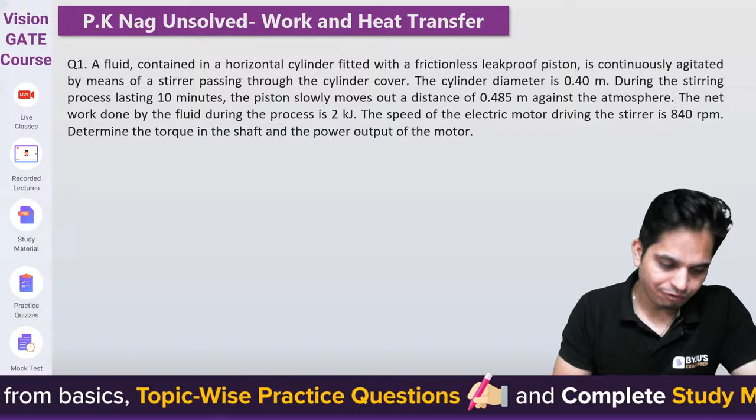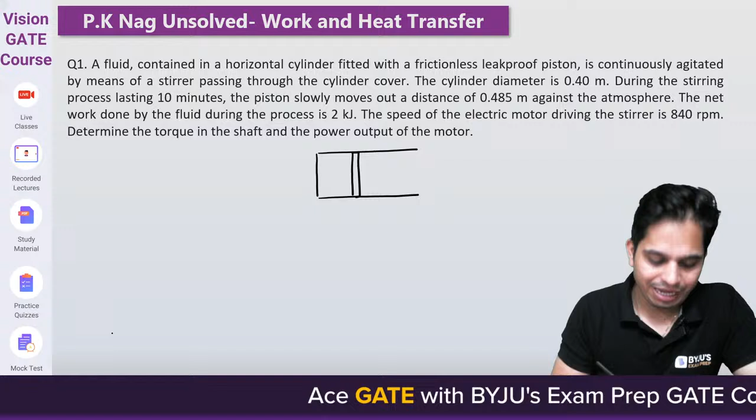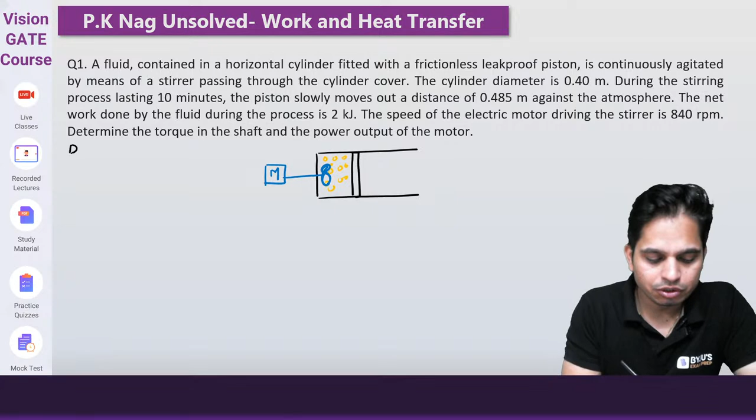The very first question. A fluid contained in a horizontal cylinder fitted with a frictionless leak-proof piston. Okay, so what do we have? We have a cylinder and we have a piston here, and we have some fluid in it. And it is continuously agitated by a stirrer. Okay, and this stirrer is run by a motor. Okay, now the cylinder dia is 0.4 meter, and during the stirring, lasting for 10 minutes,

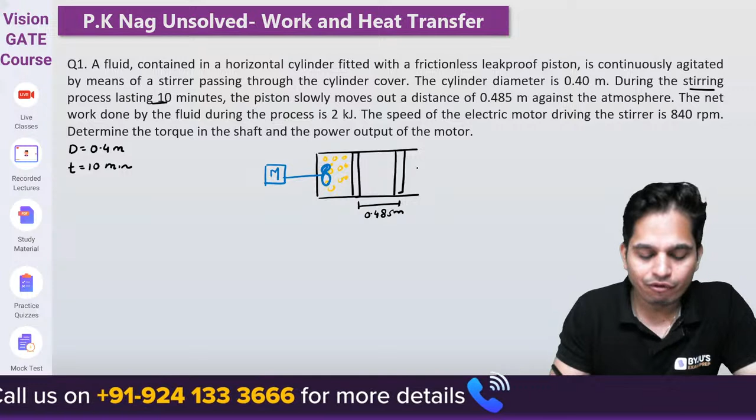that is, time of stir is 10 minutes, the piston slowly moves a distance of, how much distance it travels? It travels 0.485 meter against the atmosphere. The net work done by the fluid during this process is 2 kilojoule. Net work done is equal to 2 kilojoule. Now tell me, what is net work done? So work output minus work input is my net work.

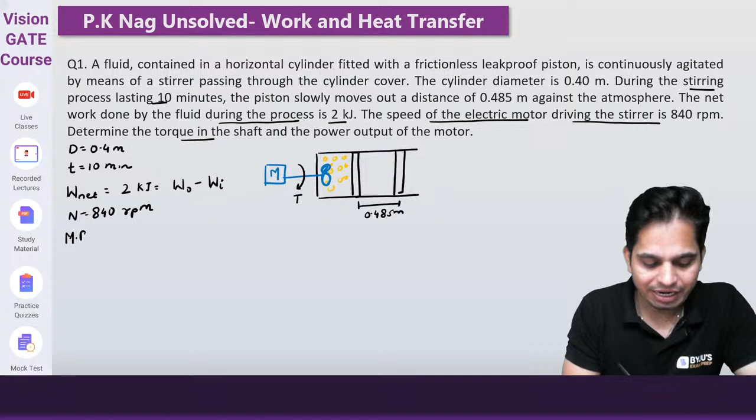The speed of the electric motor driving the stirrer, that is N, is equal to 840 RPM. Determine the torque in the shaft. Torque I need to find out, and motor power I need to find out, that is shaft power. So tell me, I know one thing. That power, shaft power or motor power, is equal to torque into omega. So torque will be equal to motor power upon omega.

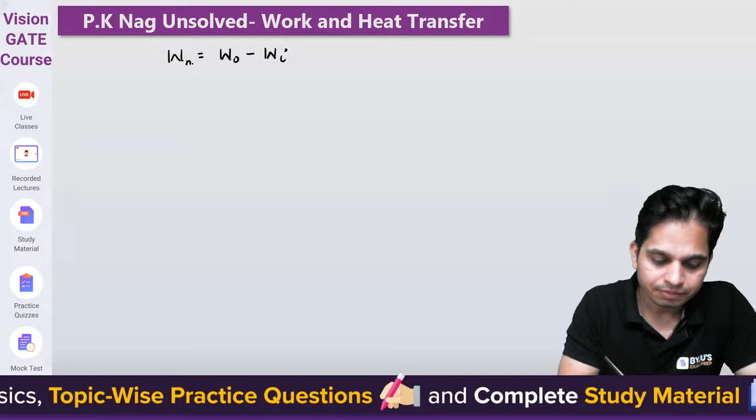And what is motor power? It is basically work input that you are giving. Okay, and omega is 2 pi N by 60. So I need to find out this. How can I find out this? As you all know, net work is 2 kilojoule. Let me solve it here. So net work is equal to work output, the work done by fluid, minus work input. So net work is 2 kilojoule.

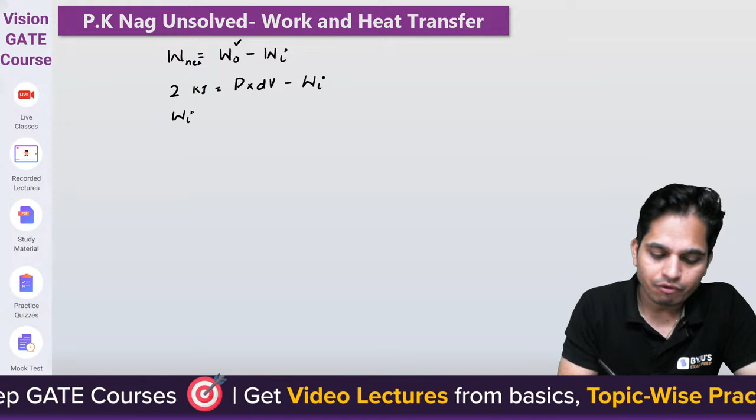What is work output? Work output from the fluid is due to the distance traveled by the piston, and it is happening against the constant pressure of atmosphere. So it is P dV minus work input. So work input is equal to P dV minus 2 kilojoule. Now what is the pressure, guys? Pressure is atmosphere, 101.325 kilopascal. What is dV? dV is area of piston into distance traveled. So it is 101.325 into pi by 4 D square into L minus 2.

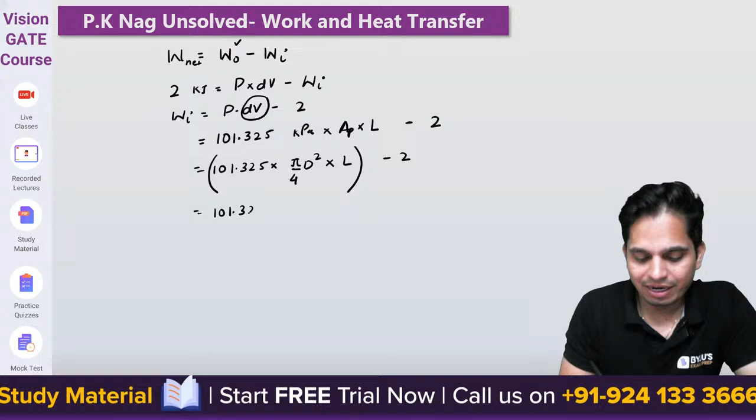101.325 into pi by 4. D square is how much? Diameter is 0.4, and length is 0.485, minus 2. Now, can you tell me how much is the work? How much is this value? So when you solve it, it will be around 6.175 minus 2. So it is 4.175 kilojoule. So this is the work that is going in.

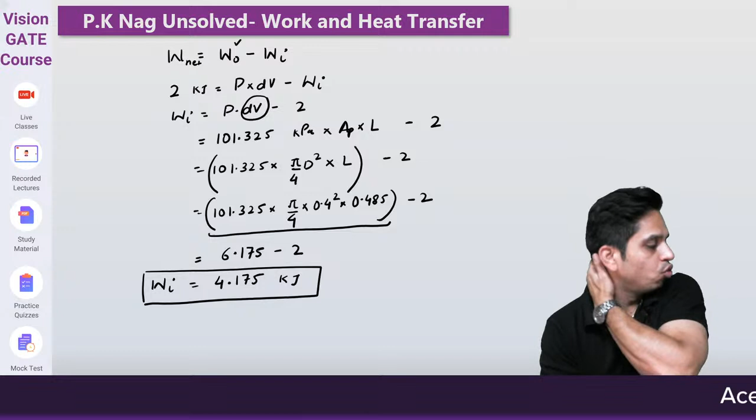I am sorry, I don't know. Satya sir, I think he takes class on the EC channel, right? So I am not very sure. But I think he is planning. So you can ask someone on the EC channel. Yeah, I am not sure. I am really sorry.

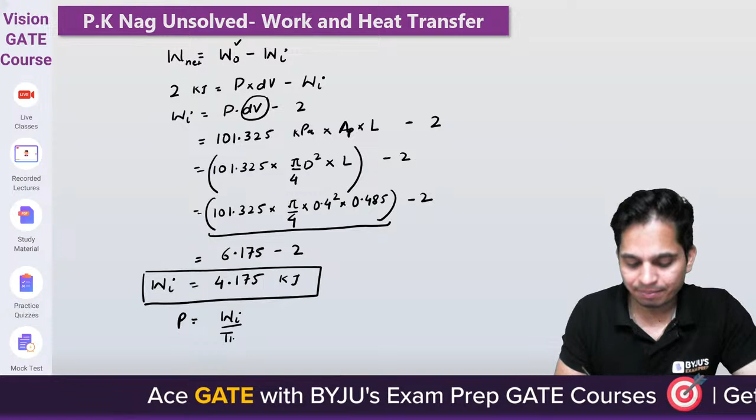Okay. So this work I have gotten. But you have to understand, I need to find power, not work, in kilowatt or watt basically. This work I am giving in kilojoule. So power is work input per unit time. So this is your motor power. So it is 4.175 into 10 to the power 3 joule upon 10 minutes into 60 seconds. So now you will get it in seconds.

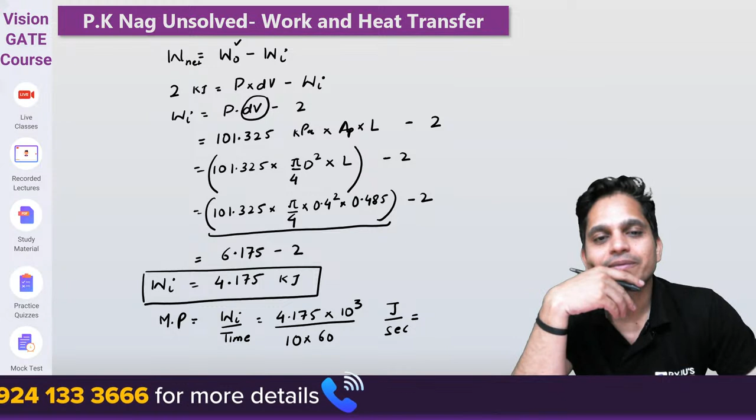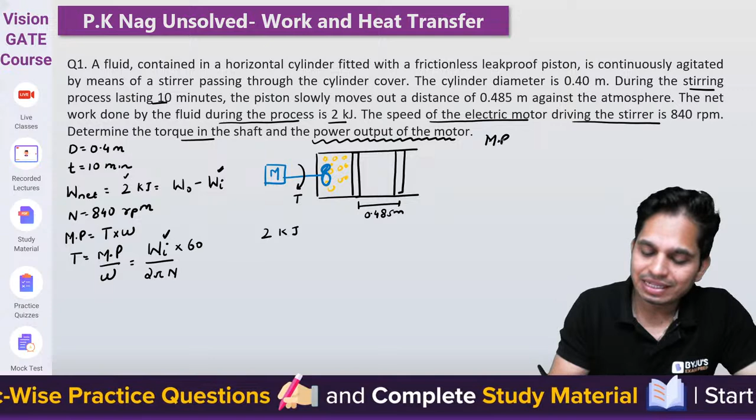How much are you going to get? You will get around 6.92 watts. So first of all, I have found out my motor power. Motor power is 6.92 watt. Now since I have gotten motor power, I can find out torque is equal to 6.92 into 60 upon 2 pi into 840.

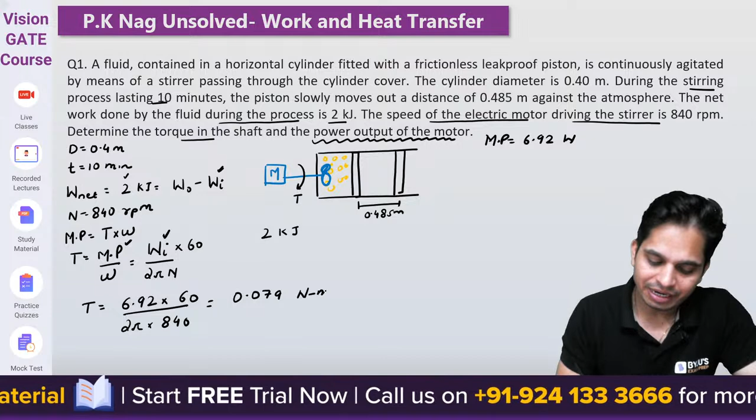What is the answer? How much torque are you going to get? You are going to get 0.079 Newton meter as the torque. Are you getting this? Guys, you have to answer, okay?

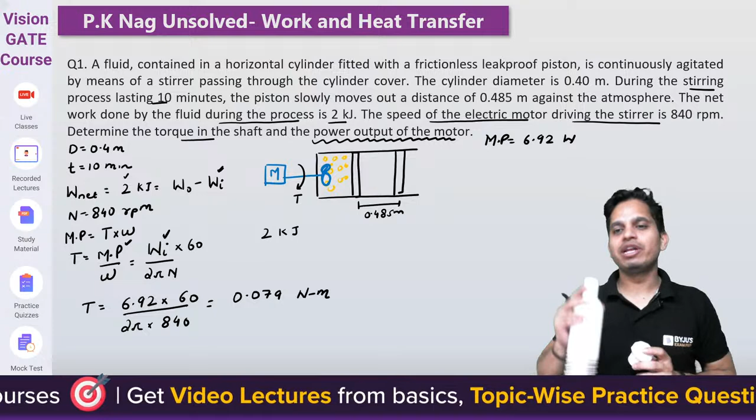This question is very confusing. A lot of students remain confused with this question, I don't know why. It's very simple. Net work is given. Okay, clear?

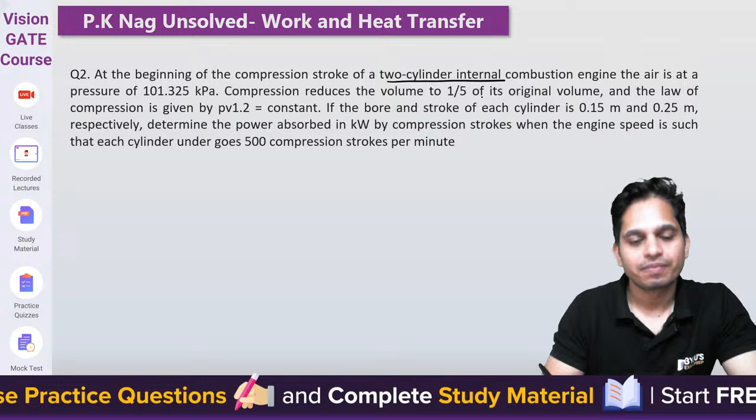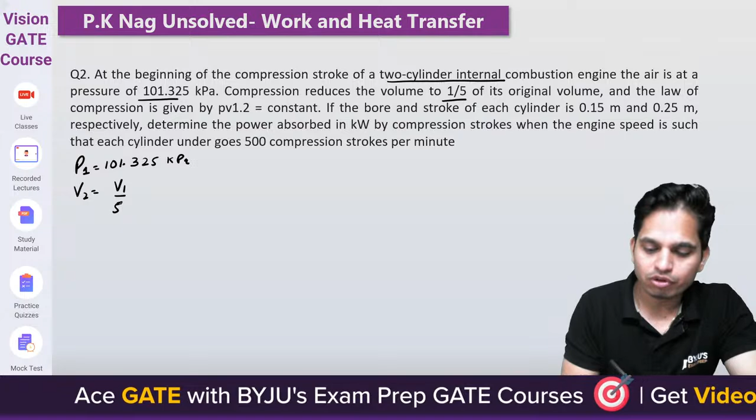Now let's move on to the next question. At the beginning of the compression stroke of a two-cylinder internal combustion engine, the air is at pressure, meaning P1 equals 101.325 kilopascal. Compression reduces the volume, meaning V2 is reduced to 1/5 of the original volume, and the law of compression is PV^1.2 equals constant.

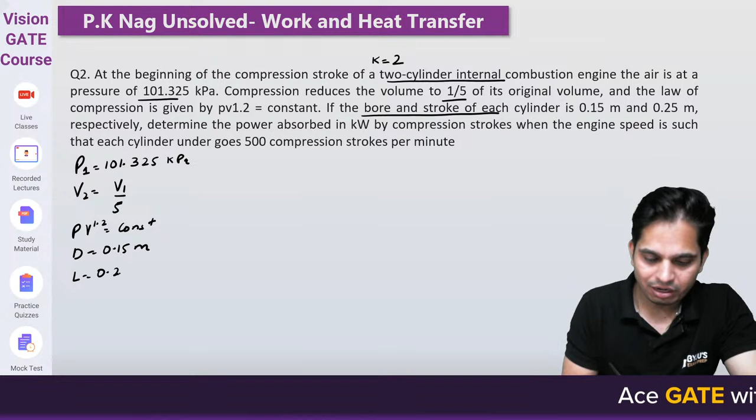Now the bore and stroke of each cylinder is given. We have two cylinders, so K equals 2. Bore is given as 0.15 meter and stroke is given as 0.25 meter. Determine the power absorbed in kilowatt by compression strokes when the engine speed N equals 500 RPM.

500 RPM. If you remember this diagram, when compression happens, it occurs like this - by constant pressure, then compression happens, then it goes out. So it is not 1, 2, 3; this process says PV^1.2 equals constant, and they are asking to work out power absorbed.

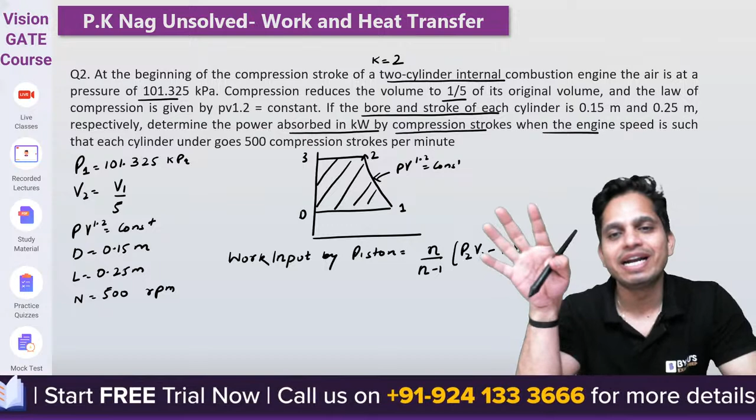So this power input is given by the piston, isn't it? It is given by piston. So if it is given by piston, first I need to find out work input, then I will calculate power. Let's talk about work input by piston, which equals n upon n minus 1, times P2V2 minus P1V1 - this is the formula we have all seen when solving these questions.

Now, n is known to me, it is 1.2. So can I say 1.2 upon 0.2? P2 is not known to me. V2 is not known to me. V1 is not known to me.

First, V1 I can find out using pi by 4 d-square into L. Everything is given to me: 0.15 square into 0.25. How much are you getting for volume V1? What you must get is 0.0042 meter cube. Yes or no?

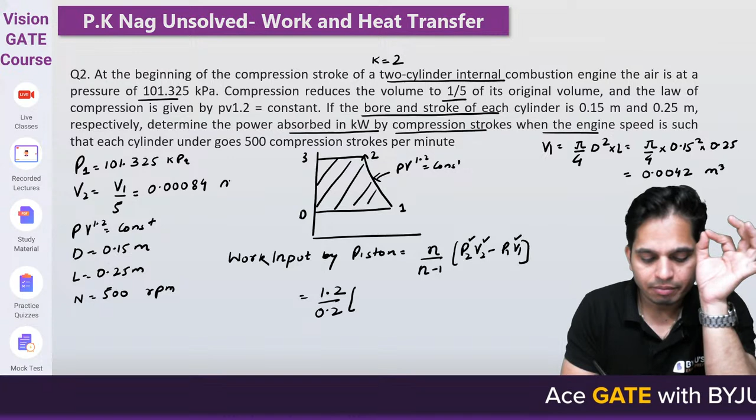Now that you have gotten V1, you can get V2. V2 is V1 divided by 5. So how much is this? This is 0.00084 meter cube. So now I know V2, I know V1, I can find out P2.

How can I find out P2? I have this equation: P1 V1^N equals P2 V2^N. So P2 equals P1 times V1 by V2, to the power N. P1 I already know, it's 101.325. V1 is 0.0042, V2 is 0.00084, and N is 1.2.

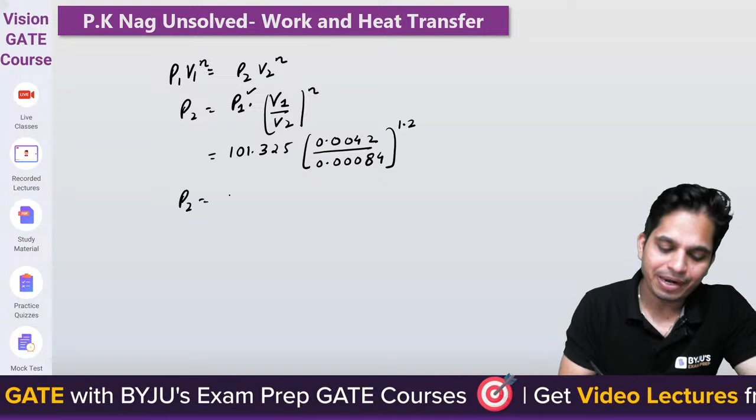So how much P2 are you going to get? This P2 equals - how much is P2 coming out to be? 700 kilopascal.

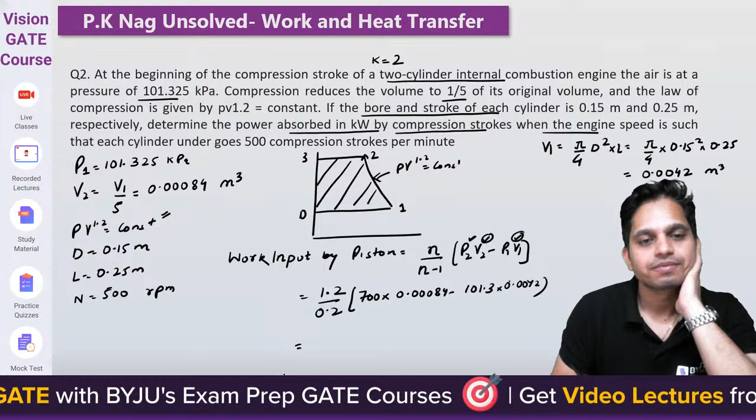So if I got P2, I can substitute here. P2 is 700 into 0.00084 minus 101.3 into 0.0042, so you will get the work. I don't know exactly how much work you are getting, but can you find out how much work you are getting?

700 into 1.2 divided by 0.2. So you will get around 0.974 kilojoule. Yes.

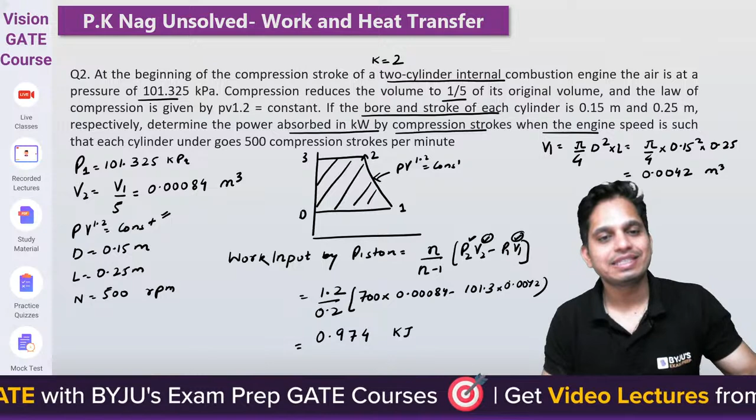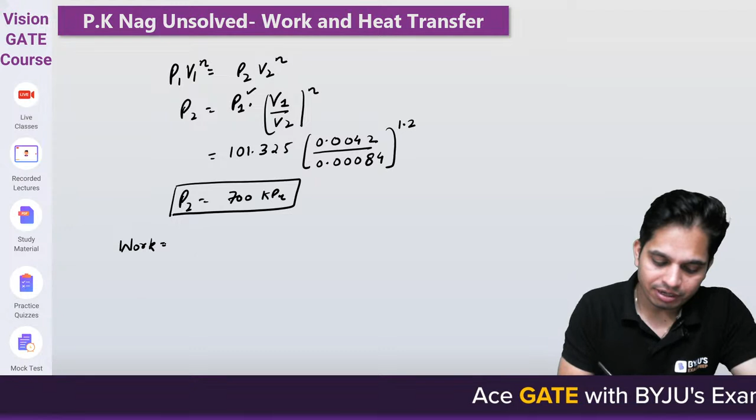This is what you are getting. And now they are asking power, not work. So I need to convert this work into power. Power is equals to work per unit time, and therefore I have 0.97 kilojoule upon RPM.

RPM is 500 revolution per minute. First of all it is RPM, so it's 500 by 60 per second. And we have two cylinders, so total power I need to find out. We have two cylinders, so if you can find this out, tell me how much you are going to get.

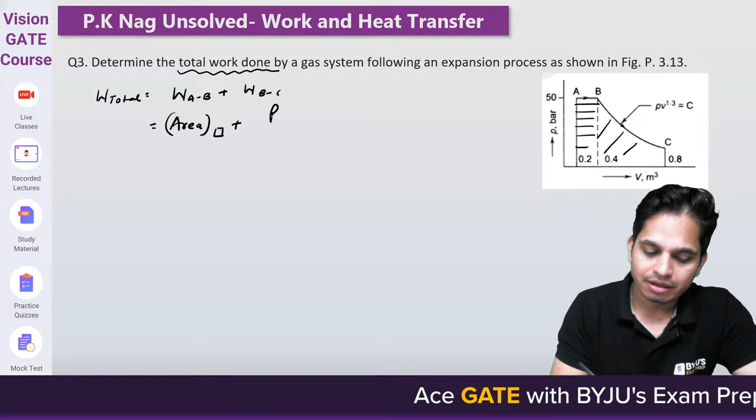BC I need to find out. So BC is a polytropic process. What is work? PB VB minus PC VC upon N minus 1. So this is height into width, length. So it is 0.4 minus 0.2.

Theek hai, now see, I know PB, I know VB as well 0.4, I know VC as well, but I do not know PC, which I can simply find out. How can I find out? PB VB to the power 1.3 is equals to PC VC to the power 1.3. So I just need to find out PC is equals to PB VB by VC to the power 1.3. So PB is how much? 50 bar, VB is 0.4 upon 0.8 to the power 1.3. Kitna aayega PC, how much is PC?

PC is I think 20 bar. Kitna aa raha hai? 0.4 divided by 0.8 to the power 1.3 into 50. 20.3 bar, 20.3. So now I know.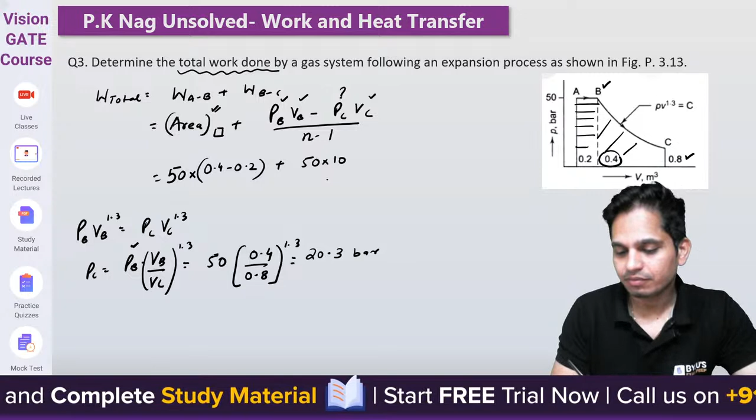So PB is 50 into 10 to the power 5. First of all, I need to write this into Pascal. So this is 50 into 10 to the power 5, now you will get in joule. So similarly, this into VB is 0.4 minus 20.3 into 10 to the power 3 into VC is 0.8 upon 1.3 minus 1. So how much is work total, kitna aa raha hai work total?

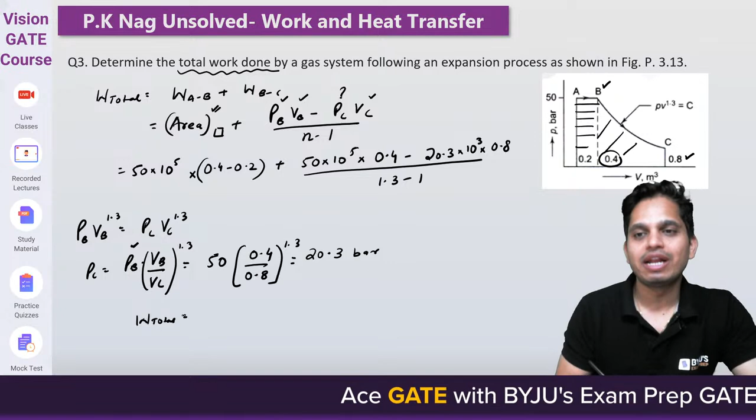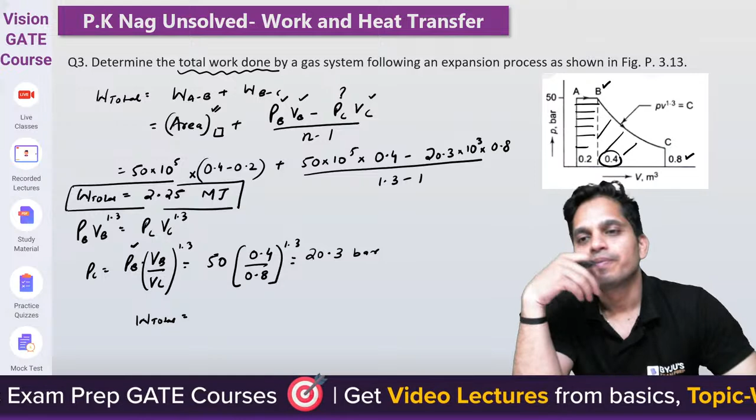Kitna aayega? You will get around this total will be around 2.25 megajoule. Toh 2251 kilojoule aa gaya, toh 2.25 megajoule aa gaya. Theek hai, aa gaya.

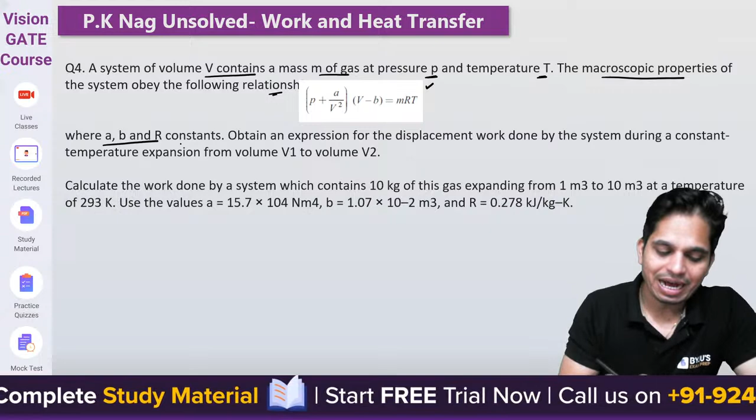Macroscopic properties obey, so this is your equation of state. Pressure, volume, temperature are related like this. A, B and R are constants. Obtain an expression for displacement work. What is displacement work? Integration P dV is the displacement work, 1 to 2, by the system during a constant temperature expansion from volume V1 to V2.

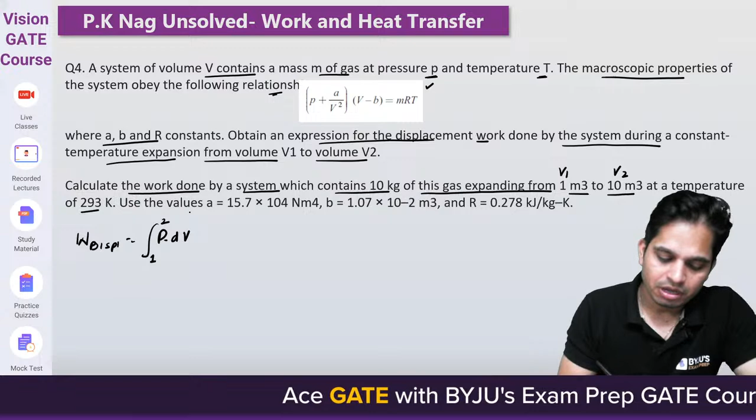Calculate the work done by the system which contains 10 kg of this gas expanding from 1 meter cube to 10 meter cube. So this is my V1, this is my V2 at a temperature of this, T is this. Use the value A is equals to this, B is equals to this, R. Theek hai, toh pehla toh yeh hai first.

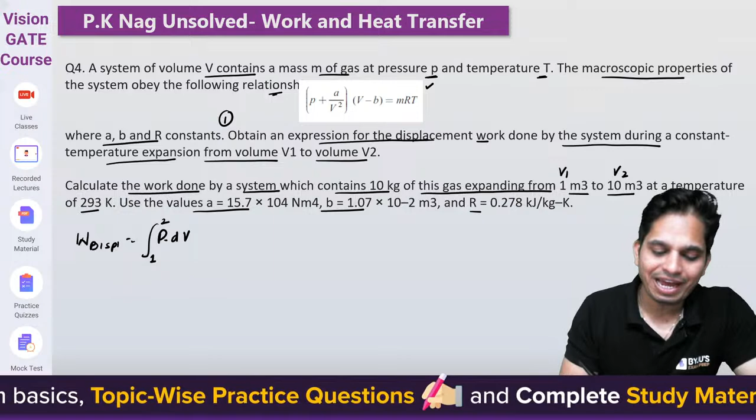And first we all know for constant temperature, what do we have? For constant temperature we all have displacement work is equals to constant, yani ki MRT1 ln V2 by V1. This is my equation anyway. But for this I need to find out.

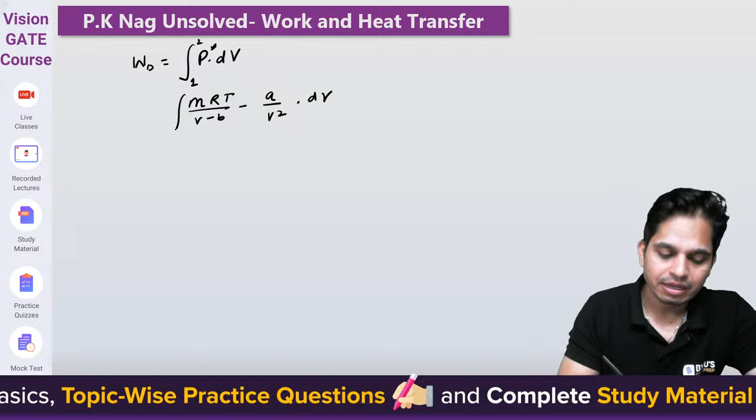So to find this out, work displacement in a general term P dV, and it is 1 to 2. Now I need pressure, and what is pressure? You see from this equation, is equals to MRT by V minus B minus A by V square is equals to pressure. So I need to keep this here. MRT upon V minus B minus A upon V square into dV, and V1 to V2. Simple, so I have to integrate this.

Okay, so integration V1 to V2 of MRT upon V minus B dV minus A by V square dV. So you can do the integration, you can do the simple integration and you are going to get MRT ln.

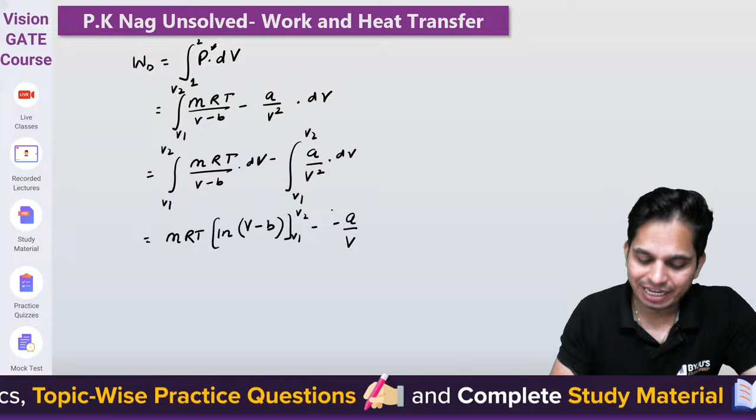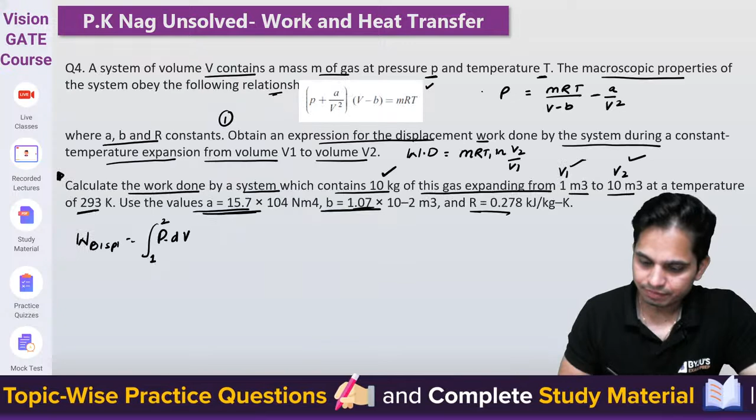Okay, so you have mass, V1, V2, A, B, R, and temperature also. Mass is 10, R is 0.278, temperature is 293. ln, V2 is 10, this is 1, B is 1.07, plus A is 15.7, 15.7 into 10 to the power 4, 1 upon 10 minus 1 upon 1, and you can find out your work.

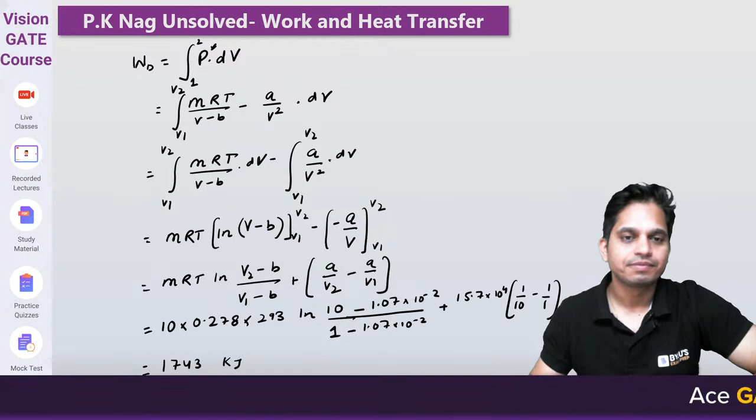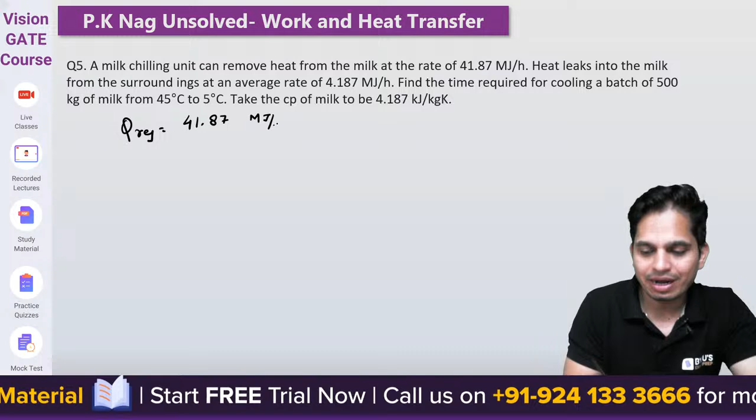A milk chilling unit can remove heat from the milk. So Q rejected is 41.87 megajoule per hour. But heat comes in, so Q in is equals to 4.187 megajoule per hour. We need to find the time required for cooling a batch of 500 kg of milk from this temperature to this temperature, and Cp is given as 4.187.

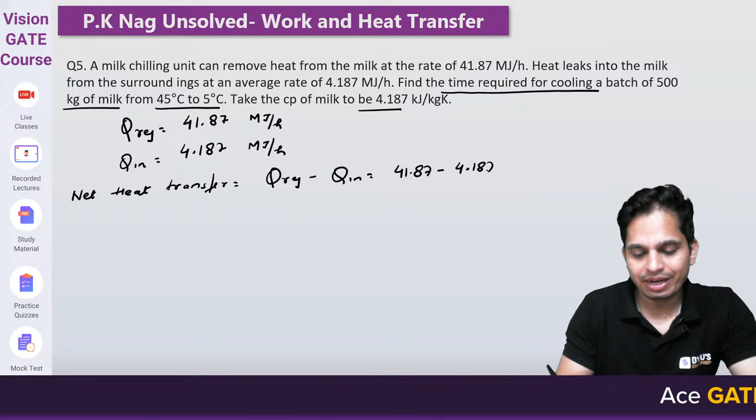So first of all, you need to find out the net heat transfer. How much net heat transfer do you need? That will be Q rejected minus Q in, and that is 41.87 minus 4.187. So what is the net heat transfer you are getting? Around 37 point something, 37.683 kilojoule per hour. Theek hai?

Now this is the net heat transfer rate. But how much heat are you removing? Q transfer is equals to mass Cp dt. Mass is 500 kg, Cp is 4.187, into dt which is 45 minus 5, that means 40. And this will be in kilojoule.

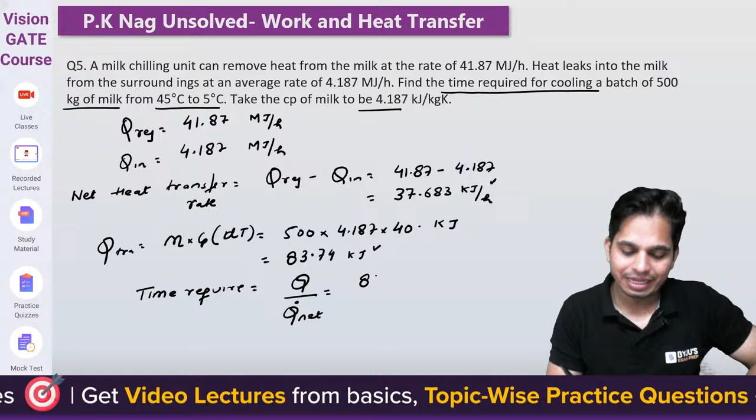So how much heat are you rejecting? 83.74 kilojoule you are removing. So if you are removing this much kilojoule, and this is rejected per unit hour, 37 is rejected per unit hour, so how much time is required? Time required is equals to Q upon Q dot net, which is 83.74 kilojoule upon 37.683 kilojoule per hour, and it is around 2 hours, 2 hours 13 minutes required to reject this heat.

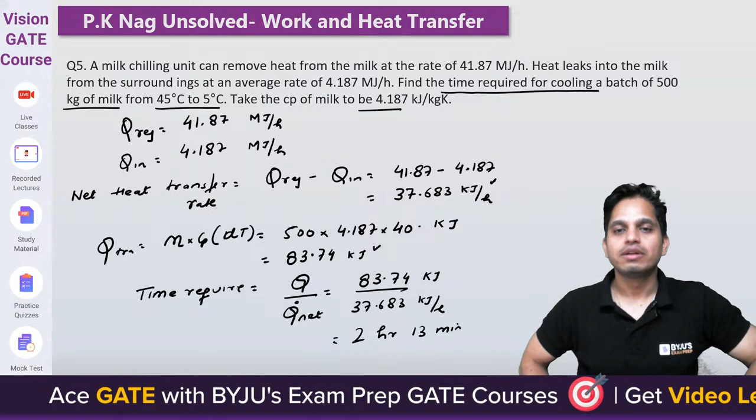Understood? Understood? Yes guys, are you able to understand this? Very simple question.

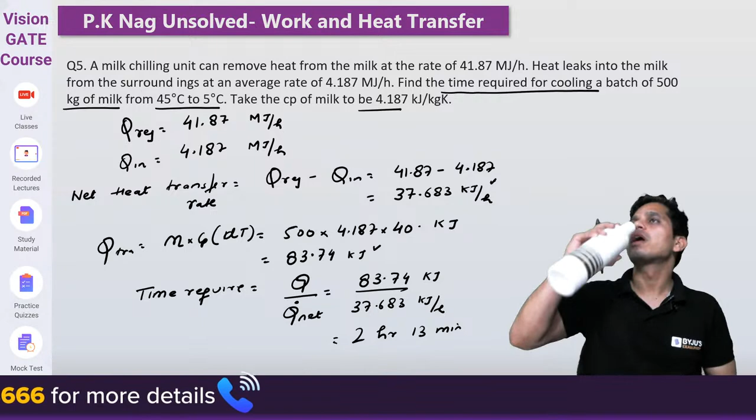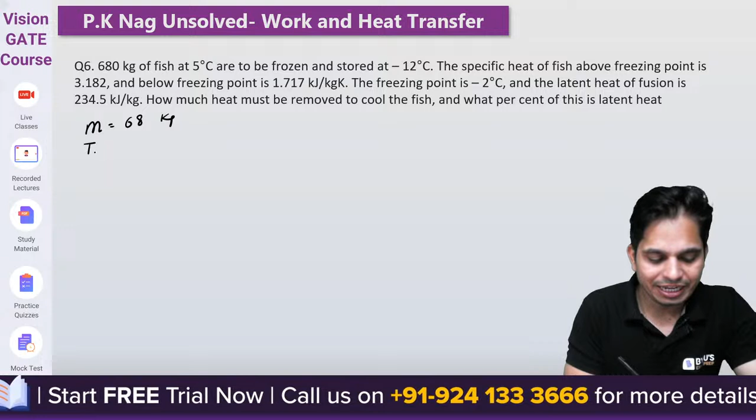Now let's come to, I think it is the last question. Okay, second last question. We want to freeze, we have mass of fish equals to 680 kg, and the temperature T1 it is at 5 degrees Celsius, and we need to reduce the temperature to, okay, fish is at T1, which is 5 degrees Celsius, 278 Kelvin, and we need to reduce it to minus 12 degrees.

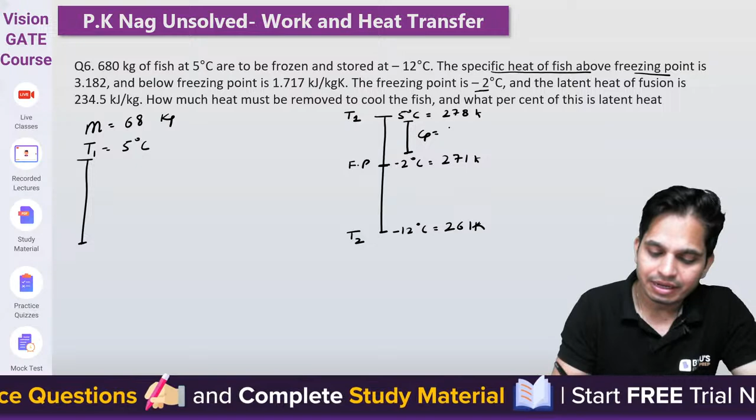So minus 12 is what? Minus 12 is 259 or what? 273 minus 12 is 261 Kelvin. The specific heat of the fish above freezing point is, so let us say there is some freezing point, freezing point is minus 2. Freezing point is minus 2 means 271 Kelvin. Now above freezing point specific heat is 3.182, and below freezing point the specific heat is 1.717.

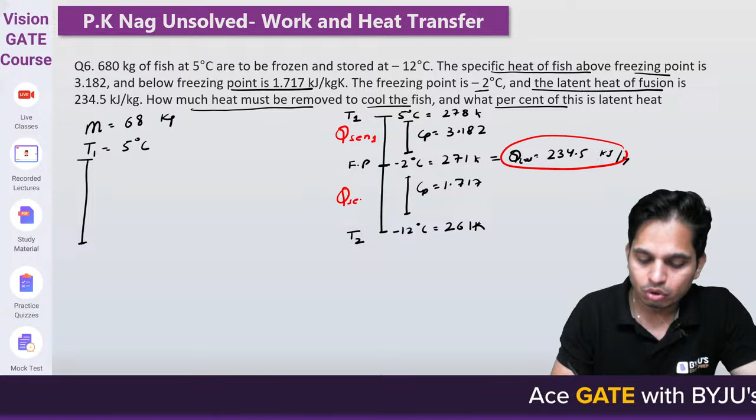Also the latent heat of fusion, yani ki here the heat absorbed Q latent is equals to 234.5 kilojoule per kg. First of all, how much heat is removed to cool the fish, then what percentage of this is latent heat. So you see, first heat will be rejected here as sensible heat, then some heat is rejected here as latent heat, and then sensible heat 2. This is the total heat that will be rejected.

So Q rejected is equals to Q sensible 1 plus Q latent plus Q sensible 2. Now Q sensible 1 is mass of fish, Cp, and temperature going from T1 to freezing point. Latent heat is mass of fish into latent heat, plus sensible 2 is mass of fish, Cp, freezing point minus T2.

Theek hai, chalo, toh mass is 500 and Cp is 3.182. Sorry, mass is 6... how did I write 500? 680. Mass is 680. Now T1 is 278 minus 271. Plus again mass is 680 into 234.5 latent heat, plus this 680. Now here you will use this Cp 1.717 into, I hope I am not hiding anything, okay, so this is 271 minus 261. Okay, thank you Anu.

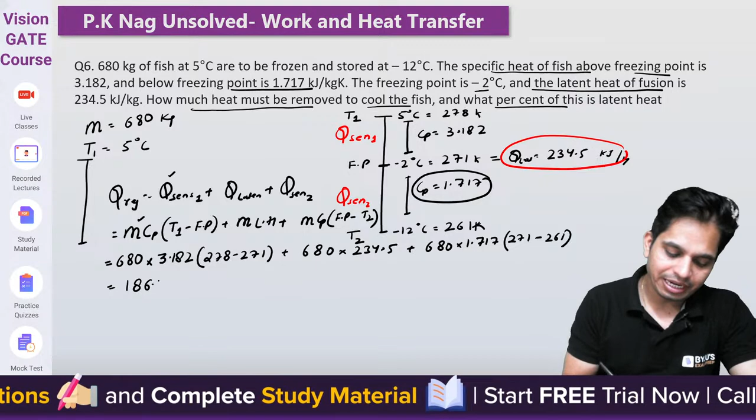Okay, so this will give you the entire heat rejected, and this is basically around 186.3 megajoule. Now this is the total heat removed.

When we talk about fraction, percentage of latent heat is equal to Q latent upon Q total. So latent heat is this, and this is around 159 megajoule by 186.3 megajoule. Okay, so your latent heat consists of around 85% of your total heat rejected.

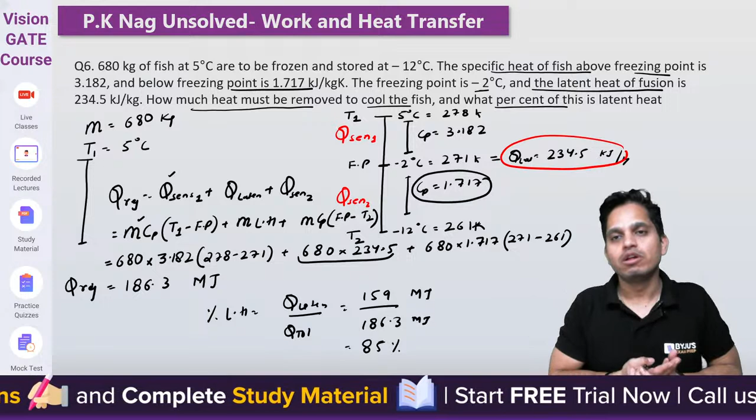You see how much heat is absorbed during latent heat. Whenever latent heat is absorbed, the specific heat capacity to absorb heat is infinite, is very high. So it can also transfer heat or absorb a lot of heat during phase change. Okay, so this is your 85% fraction.

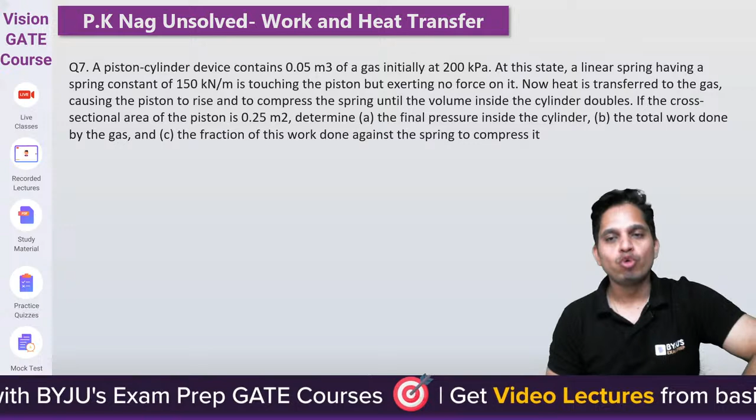Now let's come on to the last question. I will explain you the concept, but you try to do it yourself. I'll explain everything, but you try to do it yourself. Okay, now.

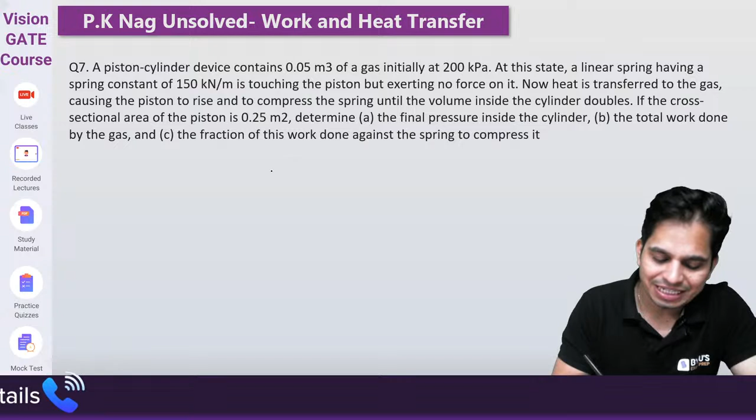The question is saying a piston cylinder device contains... So I have a piston cylinder device. Its volume is 0.05 meter cube and initial pressure is 200 kilopascal. Now at this state, a linear spring having a spring constant is touching the piston but exerting no force. There is no force at this point of time. K is equal to 150 kilonewton per meter.

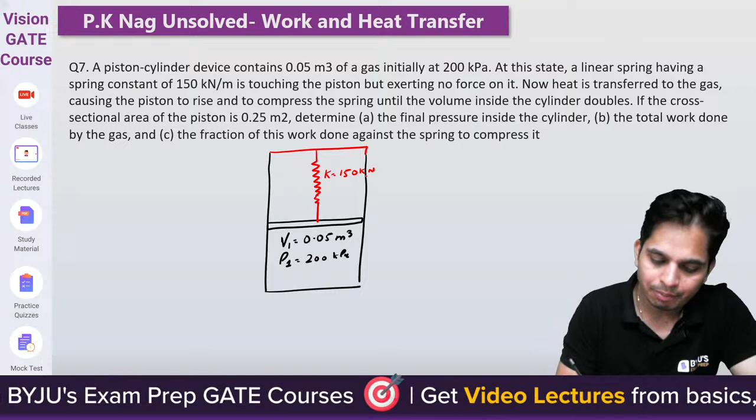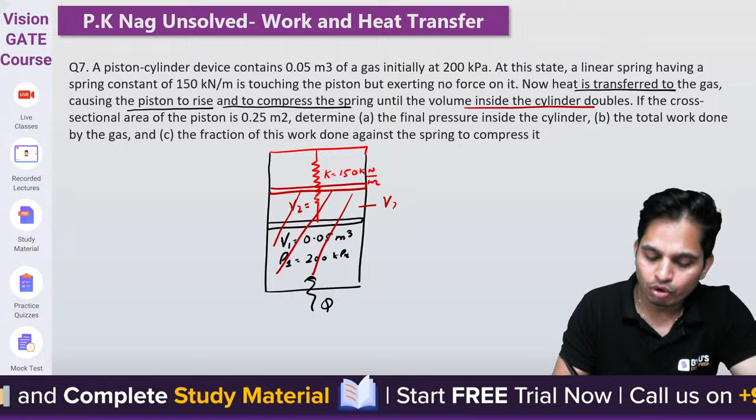Now you are transferring heat. Heat is transferred to the gas, causing the piston to rise and to compress the spring. So when I am supplying heat, the piston is rising, and now the piston will reach here, let us say, until the volume becomes double. So V2 is equal to 2 times V1. That means final volume V2 is equal to 0.1 meter cube.

Now cross sectional area of piston is given, 0.25 meter square. What do I need to find out? The final pressure inside the cylinder, total work done by the gas, and the fraction of this work done against the spring to compress it. 3 things I need to find out. So first of all, final pressure. Tell me.

Initial pressure is P1. Can I say final pressure is equal to initial pressure P1 plus, when the piston moves up, a force is applied by the spring, and because of this a pressure will be applied. So can I write P spring, the pressure exerted by spring? Yes. Now P1 is 200. What will be P spring? Force of spring per unit area.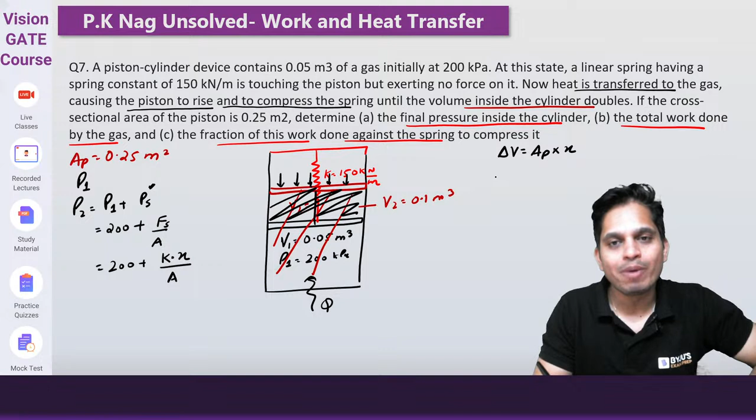And force of spring can also be written as K into X, by area. Okay. Now I know K, I know area, but I do not know X. How can I find out X? As you all know, change in volume is equal to area of piston into X. So this is the volume change, and it is V2 minus V1.

0.05 equals area of piston 0.25 into X. So X you will get here, I think around... just check. Okay, 0.2 meter you are going to get. Okay, this is your X. So now you know X as well, you know K as well, area also you know.

You can find out P2 as 200 plus 150 into 0.2 upon 0.25. How much is P2 coming? Around 320. P2 is 320 kilopascal.

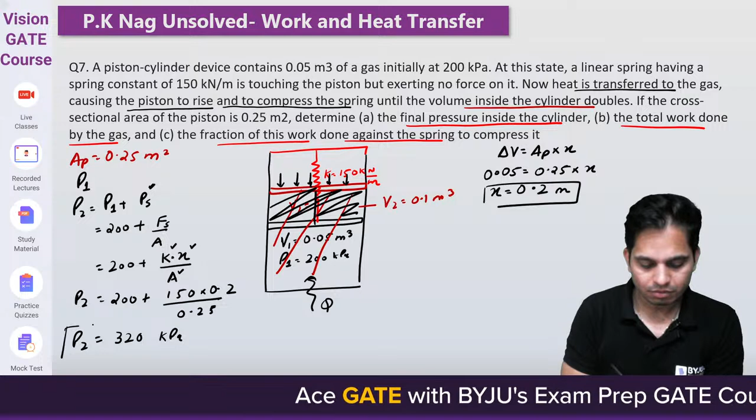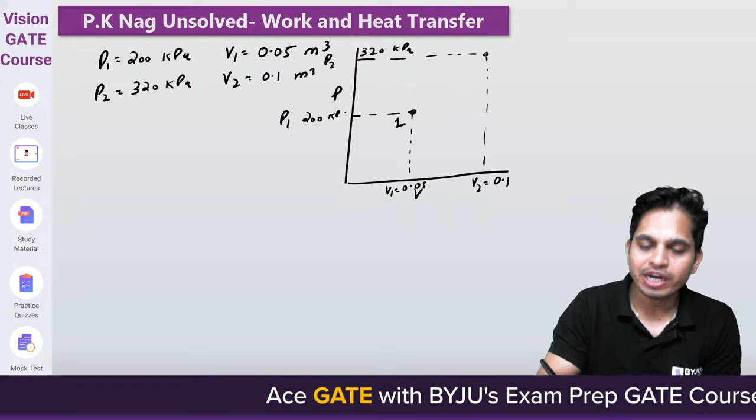Now, very important concept here. You know P1 is equal to 200 kilopascal, V1 is equal to 0.05 meter cube, P2 is equal to 320 kilopascal, and V2 is equal to 0.1 meter cube. But how are you going here? If I draw a PV diagram, P1 is 200 kilopascal, V1 is 0.05, P2 is 320 kilopascal, V2 is 0.1. I know both states, but how I am going from 1 to 2, that is the question.

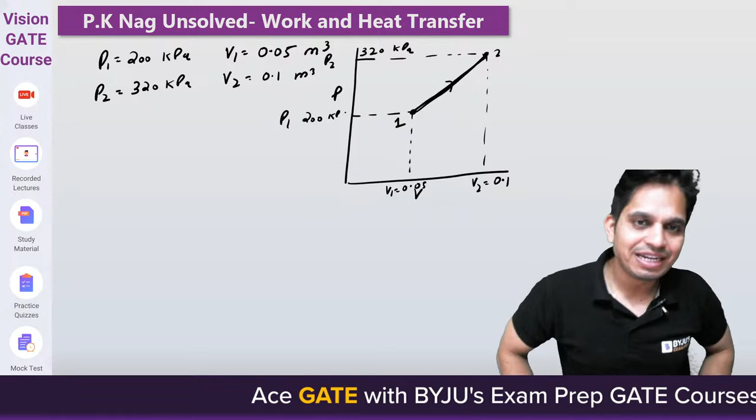Whenever a spring is there, a linear process happens. You always go slowly, linearly, and this is how you go from 1 to 2. Usually they do not give you this, but you need to know this. Whenever a spring is there, you can assume it is a linear process. And when it is linear, you can easily find the work. They are asking the total work done by the gas. So work total is equal to area under curve.

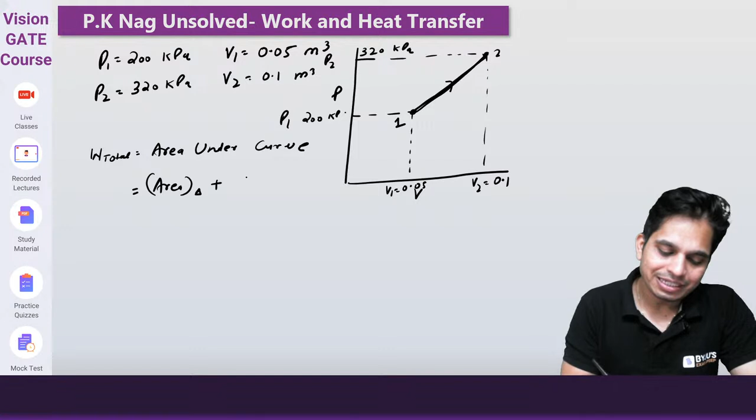And area under curve. So it is area of triangle plus area of rectangle. So either you can do it individually, or you can do one thing. Same thing you are going to get: 1 by 2, P1 plus P2, into V2 minus V1. You can do it individually as well, or basically if you simplify these things, you will get the same answer. Okay? So it is 320 plus 200.

Kitna aayega? 520 into 0.05. So total work you will get. How much? 520 into 0.05 by 2, and it is 13 kilojoule.

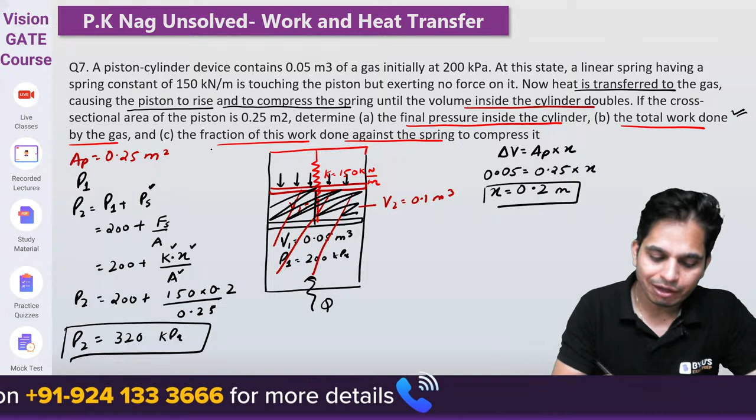Now the final thing they are asking is the fraction of work done against the spring. So against the spring what is happening? This area of triangle is happening against the spring. This is the work against the spring. So work of spring I can find out by area of triangle. It is half base into height.

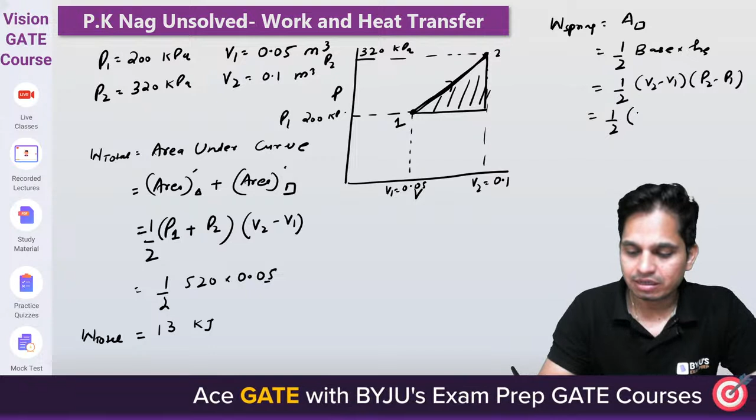So half base is how much? V2 minus V1. Height is how much? P2 minus P1. So again, if you do the same, it is 0.05 and it is 120. It is 3 kilojoule. So they are asking fraction, yani ki work of spring by total work, and it is 3 by 13.

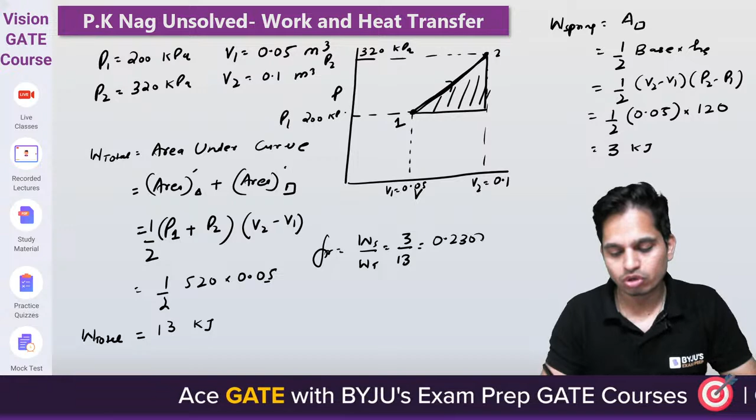So I don't know how much is this. Kitna aa raha hai fraction? 0.2307 or 23% is the answer. Okay. So this is the fraction.

Okay. Chalo, very good. So we have covered a lot of questions. We have covered almost around 15 questions combined today and the last session of work and heat transfer. Because from this, a lot of questions you see in GATE exam. This is the most important and most confusing topic in thermodynamics. That's why I have taken 2 separate sessions for this. Combining both the sessions, we have solved around 15 questions, maybe more. And these are all good questions. If you understand the concept, they are all simple questions. And solving P.K. Nag questions is a very good idea before GATE exam.